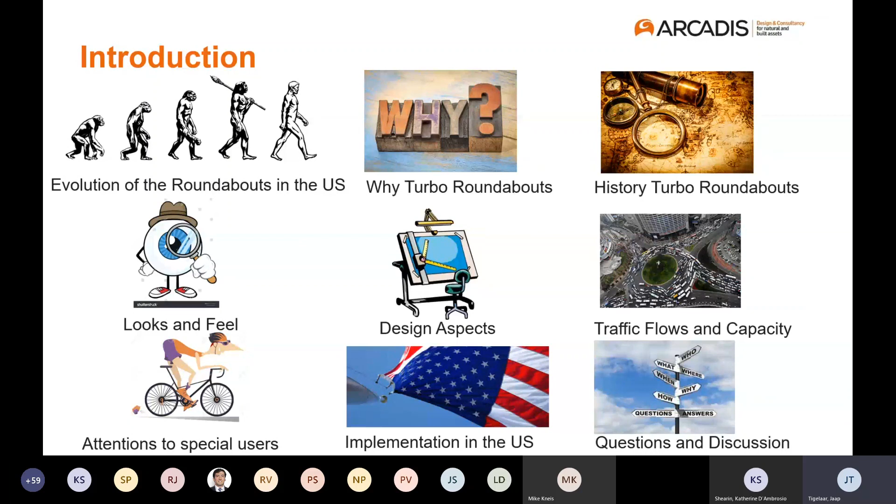For today, I'd like to touch some of the topics: dig into a bit of the evolution of roundabouts in the US, discuss why turbo roundabouts, what they are, a bit of the history, looks and feel, some details of the design aspects, traffic flows and capacity, special users like bicycles and how they use turbo roundabouts, and aspects needed for implementation in the US. And of course, afterwards there's a question and discussion possibility.

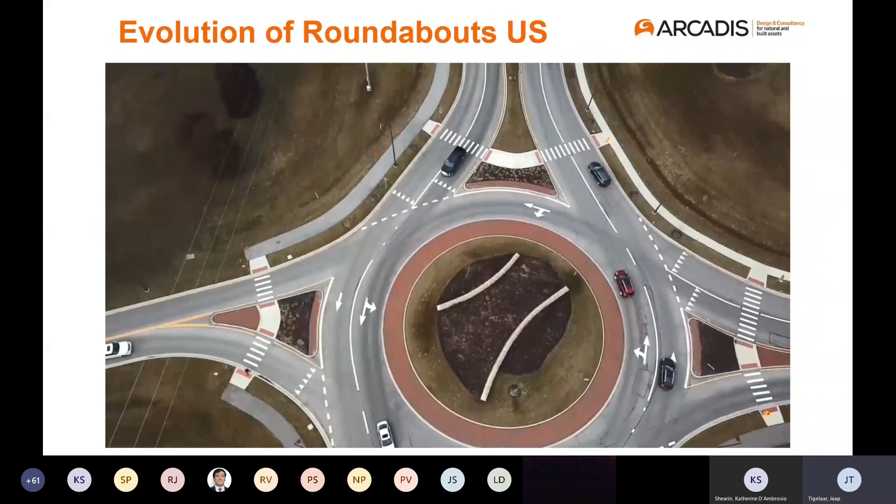So let's get into roundabouts. The roundabout journey in the US already included the simple single lane roundabouts, and we got them down pretty easy to design. We use them in urban and rural areas, low speed and high speeds. After that, we blew them up to multi-lane roundabouts, and we saw some interesting topics and problems handing over to double lane roundabouts - we'll touch that later on. After blowing them up, we also shrank them to mini roundabouts. They work well in residential and low-speed commercial areas.

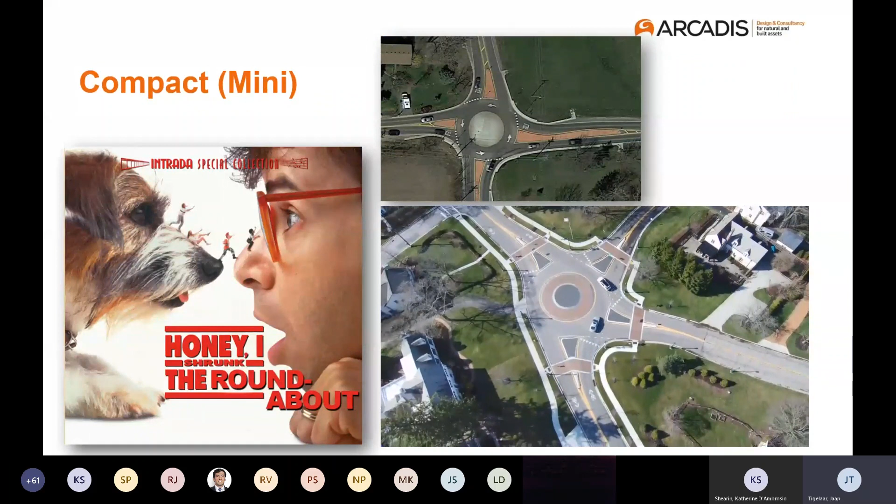But what will be next? What's the next tool in the toolbox? Can there be another type of roundabout? I think there might be - and that's the turbo roundabout. That's the typical Dutch solution for multi-lane roundabouts as we use in the Netherlands.

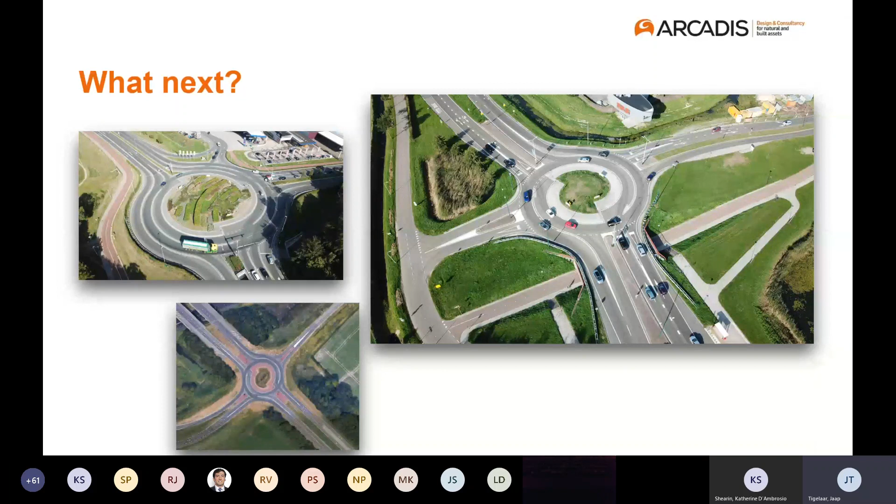So why the turbo roundabout? Well, in the 80s in the Netherlands we introduced the single lane roundabouts, and since then we've built almost 8,000 of them. Like in the US, they were very successful in the Netherlands. But with the increase of traffic and traffic volumes, the single lane roundabouts reached their capacity, and we replaced them with multi-lane roundabouts.

But this was not matched by an increase in capacity. We did not see the capacity double, and we didn't keep the same safety improvements as we had with the single lane roundabouts. We saw some fender bender crashes - people using the inside lane, hitting cars in the outside lane when leaving the roundabout. This issue we saw happening in the late 90s in the Netherlands, and this is similar to what we're experiencing in the US right now.

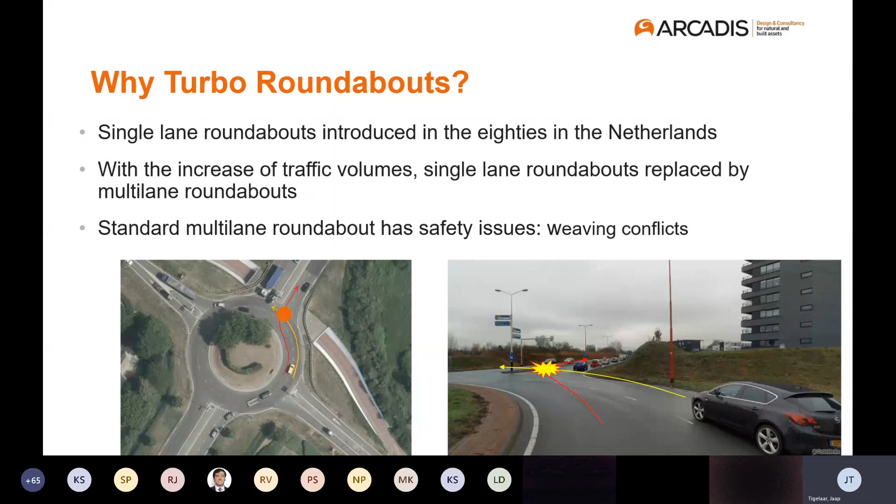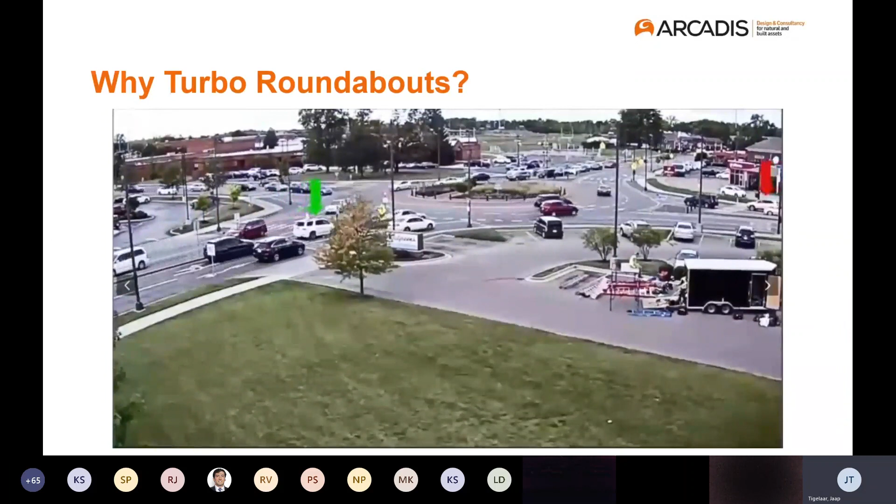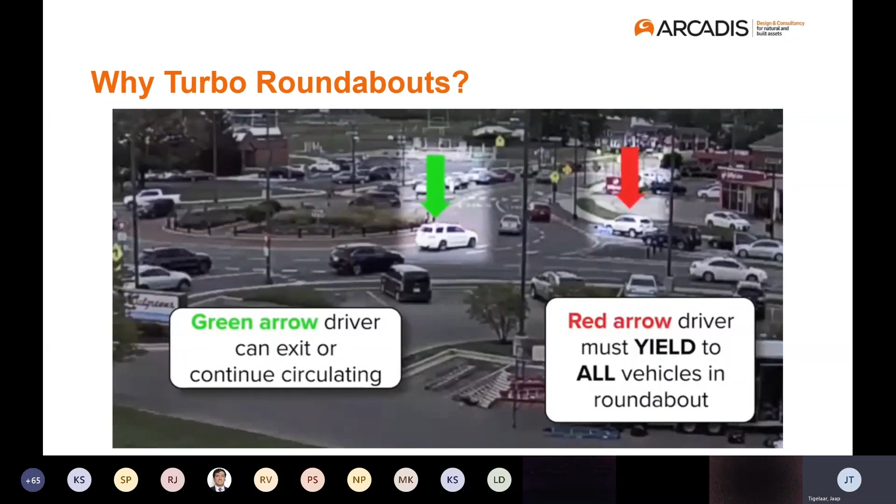So this movie illustrates two common errors drivers can make on multi-lane roundabouts. The green arrow car enters the inner lane of the roundabout, and you can see the red arrow car also wants to enter, but isn't yielding for all vehicles in the roundabout - it has to yield for all lanes at the roundabout, and we forgot to do that. So that's the first mistake: failure to yield on entry to both lanes at the roundabout.

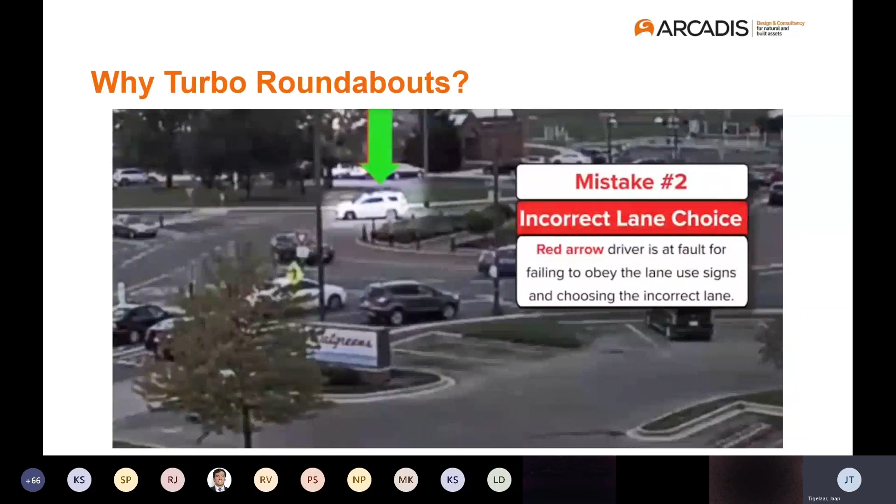When they continue, you can see what else is happening. Mistake number two: the red arrow car driver is at fault for failing to obey the lane use signs, choosing the incorrect lane, so he crashes into the car in the inner lane. When you want to make that left turn as the red car wanted to do, you needed to take the correct lane - the inside lane, not the outside lane. So those are two of the basic errors you can see happening at multi-lane roundabouts.

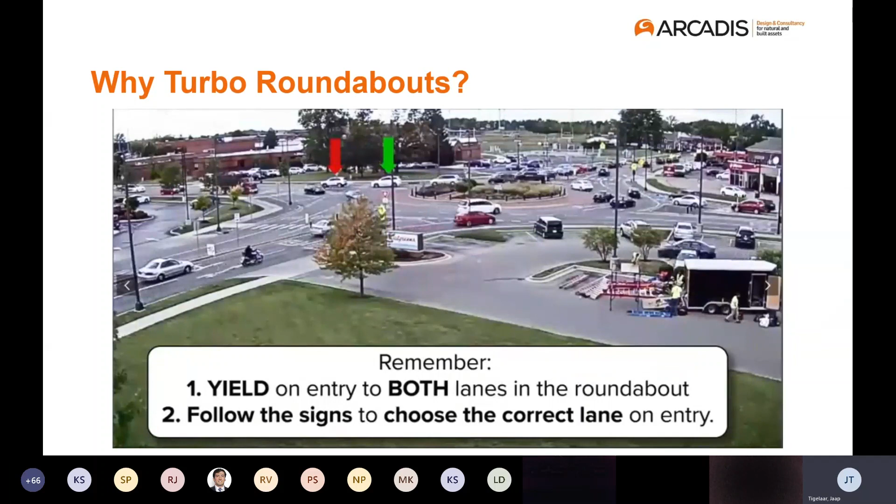And that's the safety issue we try to resolve with turbo roundabouts. So we had a challenge: design a layout which eliminates the safety conflicts but still increases the capacity. That resulted in a spiral-shaped turbo roundabout without lane changing on the roundabout itself. You may wonder why the name turbo roundabout - well, that refers to the improved traffic flow compared to a standard multi-lane roundabout, not to high speeds like the word 'turbo' suggests. Basically, we designed turbo roundabouts to operate with relatively low speeds.

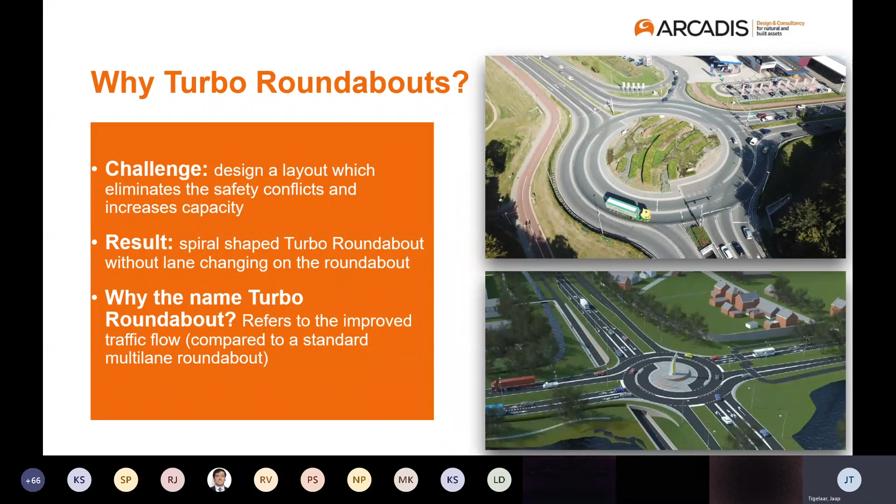So what's the turbo roundabout? How different is that from roundabouts we used to design in the US? There are four main concepts of the turbo roundabout. First, there is no lane change within the turbo roundabout. This eliminates the conflicts shown before, and this is accomplished with a small raised curb between the lanes - we'll dig into that design aspect later. With this curb in place, drivers are forced to make all lane changes well in advance of the turbo roundabout, which can be done several hundred feet before entering the roundabout.

Another very unique feature is the spiral geometry. You can think of two semi-circles of a roundabout, so you have a double lane roundabout with a little bit of an offset. This offset naturally spirals the inside lane to the outside lane of the roundabout.

And lastly, unlike many roundabouts here in the US, the approaches to the turbo roundabout are radial, that's the right angles. This is a very different philosophy on the design we use in the Netherlands instead of what we use in the US. But we will touch that a little bit later.

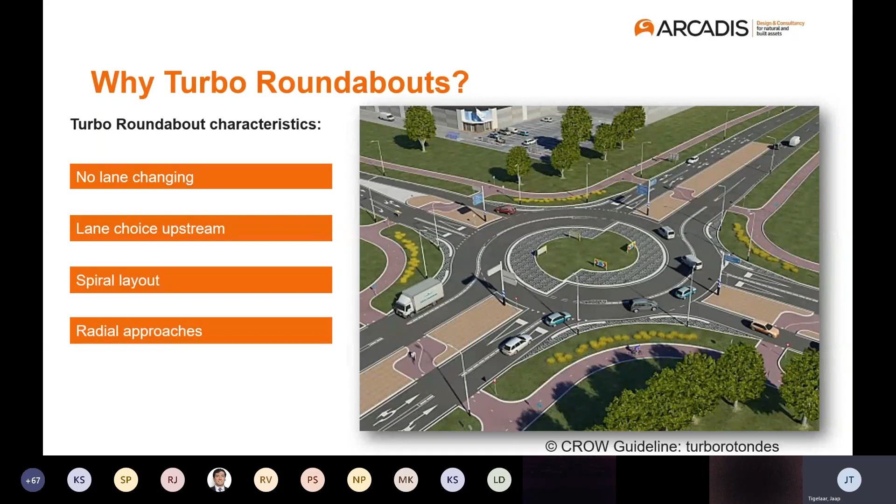And the less conflict points you have, the less chances on crashes you have. That's what we saw also in an evaluation study. One of the students, Christiaan Vos, did a study in 2016, a before and after study. He looked at several intersection types, 3 years before and 3 years after, and saw the reduction in crashes. Changing an unsignalized intersection to a turbo roundabout, we saw a reduction of 75%.

For signalized intersections, it was a similar reduction, 74%. From a multi-lane, double lane roundabout to a turbo roundabout, we saw also a decrease of 53% of the crashes. And also a single lane roundabout transformed into a turbo roundabout, we saw a 61% decrease. That is basically because you change the single lane roundabout to a turbo roundabout due to capacity conflict. If you have too many cars at the roundabout, you also have a lot of crashes. By changing and increasing the capacity to a turbo roundabout, we saw also a 61% decrease in crashes.

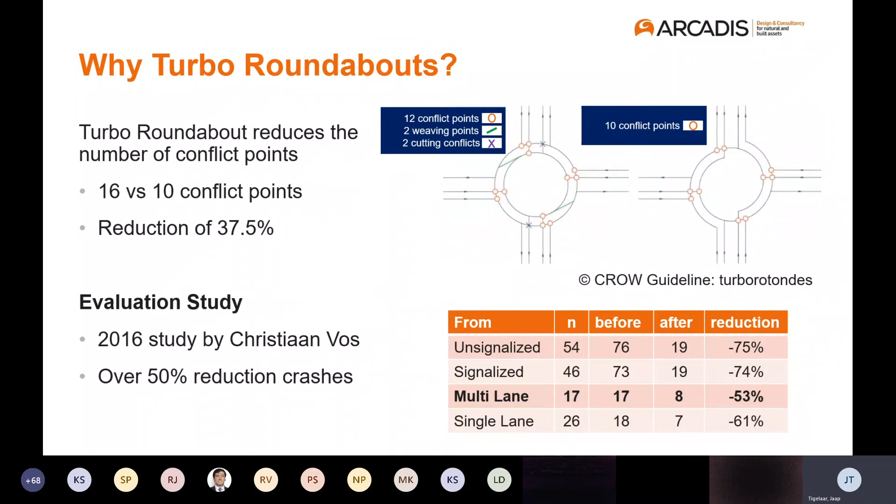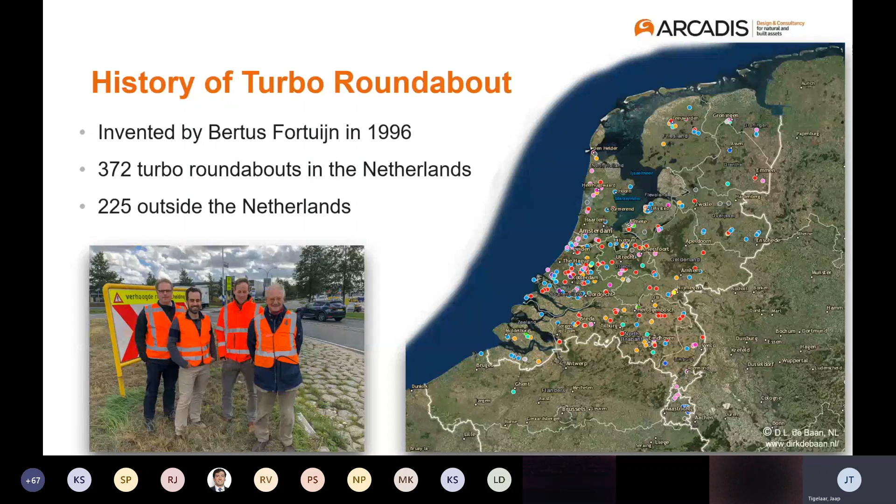Since he invented the turbo roundabout, we have already built 372 of them in the Netherlands. And if you take into account Aruba, that's 5 additional, so then it's 377. In addition to that, there are about 225 of them outside the Netherlands, basically in Eastern Europe.

In 2004, the first one came in Germany, and other countries followed, basically in Eastern Europe. Outside of Europe, there are only two of them: South Africa has one, and also in Canada there's a turbo roundabout. Well, they look like a turbo roundabout - it's not an actual turbo roundabout, I think, but they are look-alikes.

Well, what was for Fortuijn, the inventor, his design philosophy? He thought about the roundabout, and thought, how can we design safety by just implementing the right geometry? This is the turbo roundabout, and that resulted in a radial design.

Basically, a radial design makes the crossing distance, as you can see in the image, that's the colored piece, a short crossing distance - it's basically just crossing one lane. So the crossing area, the conflict area, is small, making it easy to cross, and that also raises the capacity.

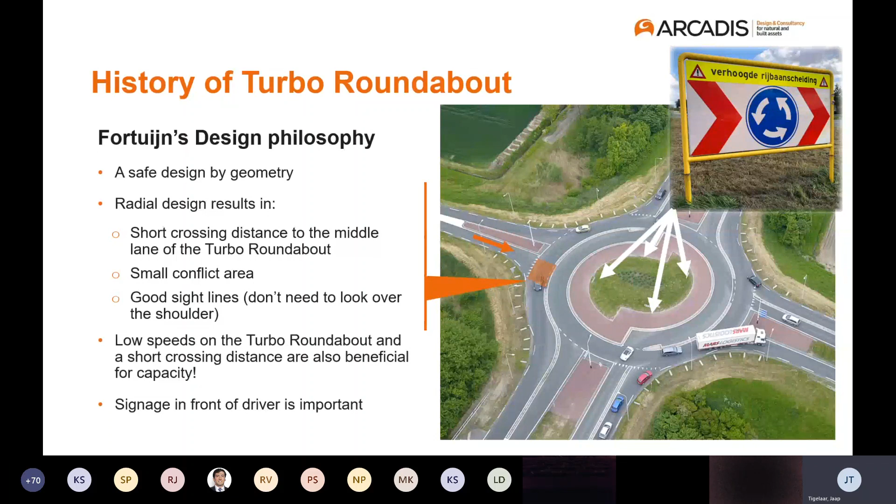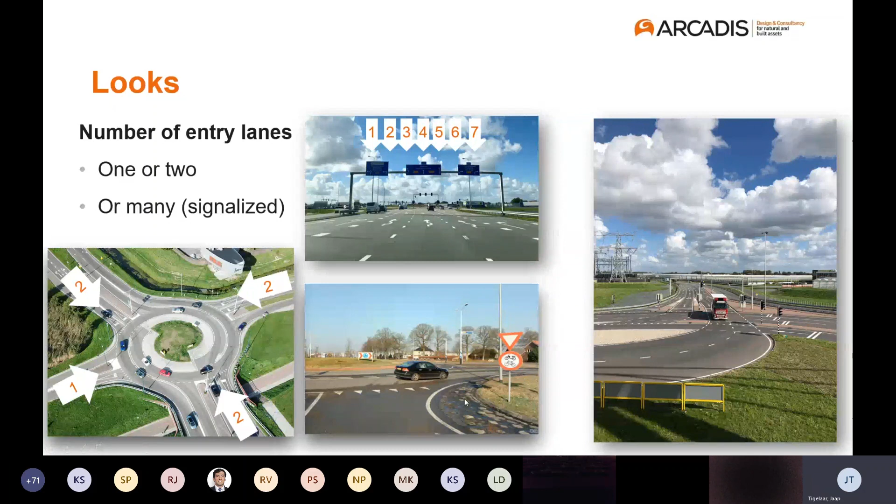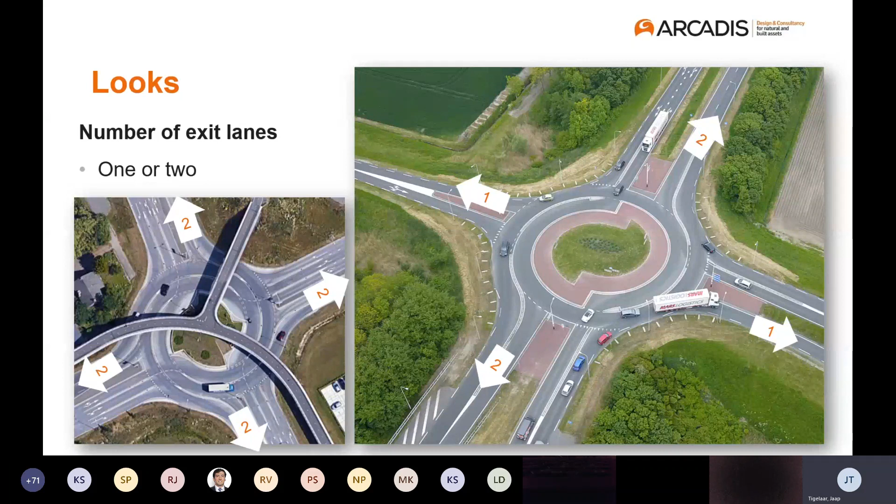You can also shape them specially. It's not necessary to have all right angles at the roundabout, so you can have different shapes in the angles. Multiple legs with an oval turbo roundabout are also possible, and we design them almost everywhere. At some interchanges with the freeway, we design peanut or dog bone turbo roundabouts.

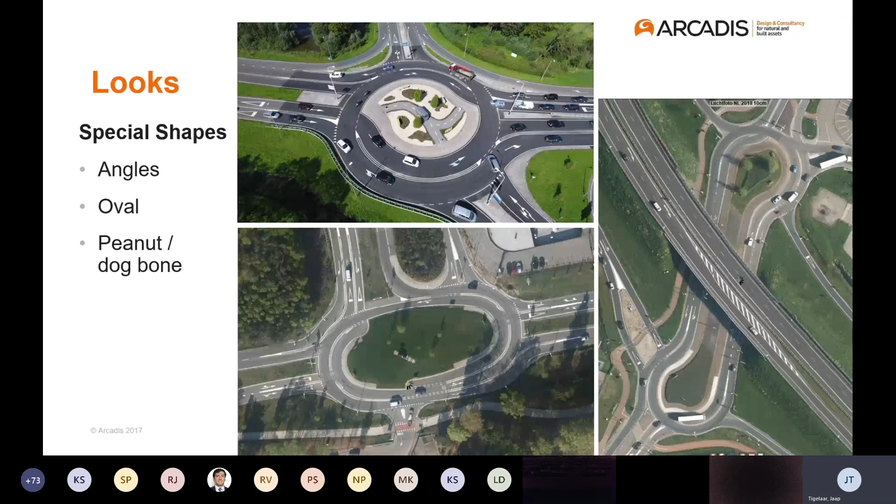Let's take a drive. How does it look? Entering the roundabout, you see signs showing which direction you need to go. This car wants to make a left turn, so it starts in the left lane, choosing the lane ahead. You can see the pavement signs and the median in the elevated lane separation.

Entering the roundabout is easy. At the roundabout itself, you are guided through it, and for the exit you just use your blinker to get out. No conflict at all, and you can reach the destination safely. This is an 80 kilometer, 50 mile per hour road.

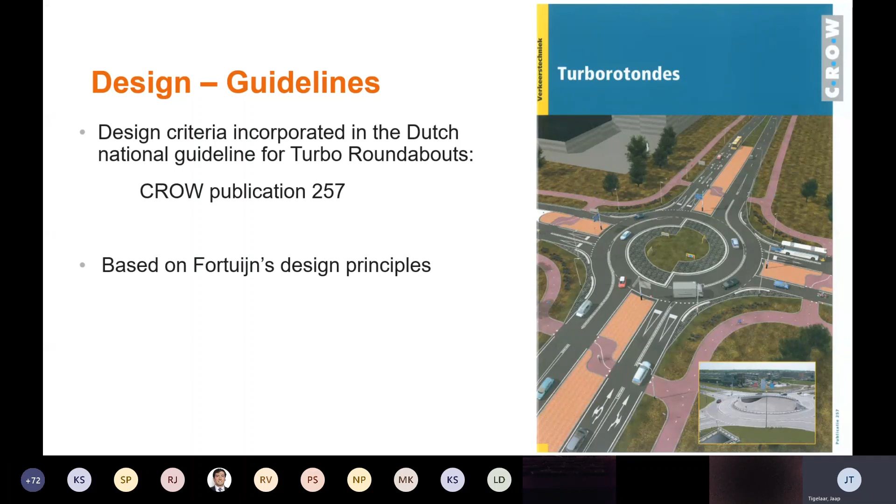A bit more into the design: all design criteria in the Netherlands are incorporated in this blue book, the national guidelines for turbo roundabouts, published by CROW publication 257. This is basically based on all of Bertus Fortuijn's principles.

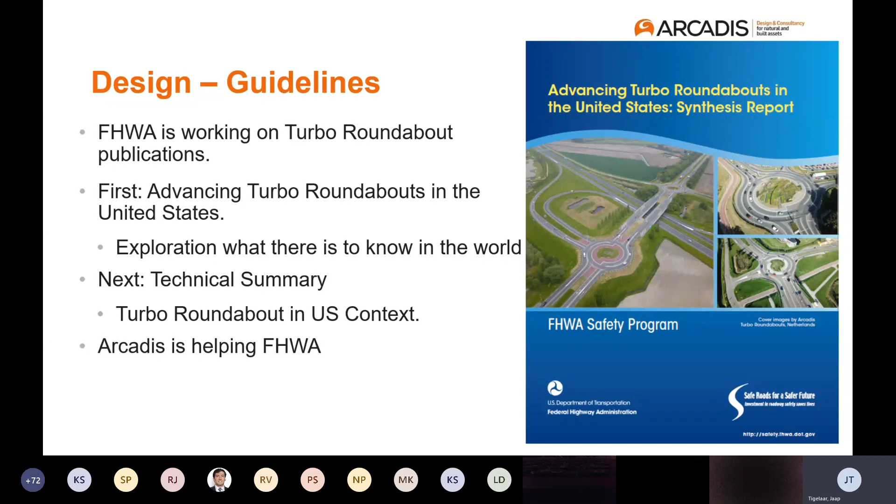The Federal Highway Administration in the US is working on Turbo Roundabouts publications, but these are not guidelines yet. The first publication is Advancing Turbo Roundabouts in the US, an exploration of what you can find in the world about turbo roundabouts. The next publication will be more of a technical summary, digging into turbo roundabout aspects in a US context. We at Arcadis are helping the FHWA with these publications because we have a lot of knowledge about them.

The spiral design, as mentioned before, the spiral geometry is a key element for the turbo roundabout. Fortuijn created a smooth spiral-shaped vehicle path by shifting the centers of the two-lane roundabouts by a single lane, as you can see in the image above. The inside lane then aligns perfectly to the outside lane, and by rotating the whole, the approaches can connect at the right radial angles. This idea looks easy, but for the actual design, the translation axis should be rightly placed on the major approaches to create similar curvature for all through traffic.

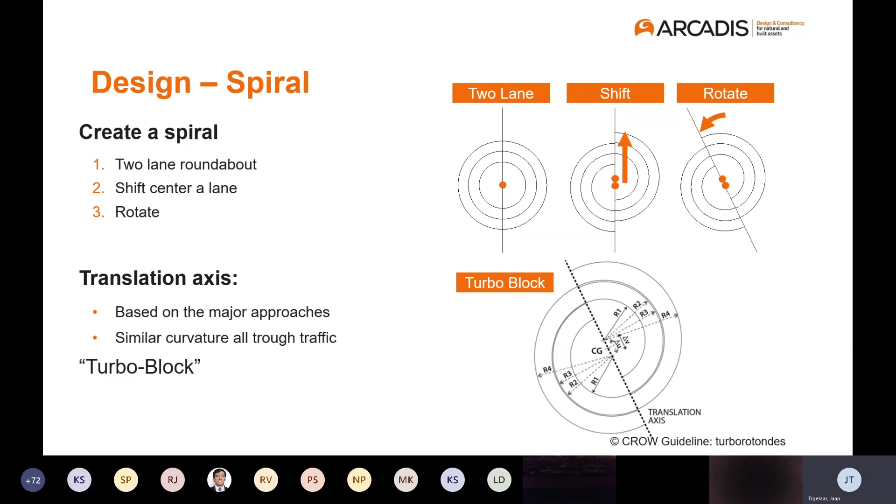This basic shape is called the turbo block. There are several turbo blocks designed by Fortuijn, and they vary in the number of approach lanes, exit lanes, and rotary lanes. Because they vary, the suitability for different locations is imminent.

As you can see, we have the basic shape turbo roundabout, this one with one translation axis. If you vary the number of entry lanes, you can see it's going to be a bit smaller capacity-wise, as shown by the blue arrows. This is for a main road with a smaller side road.

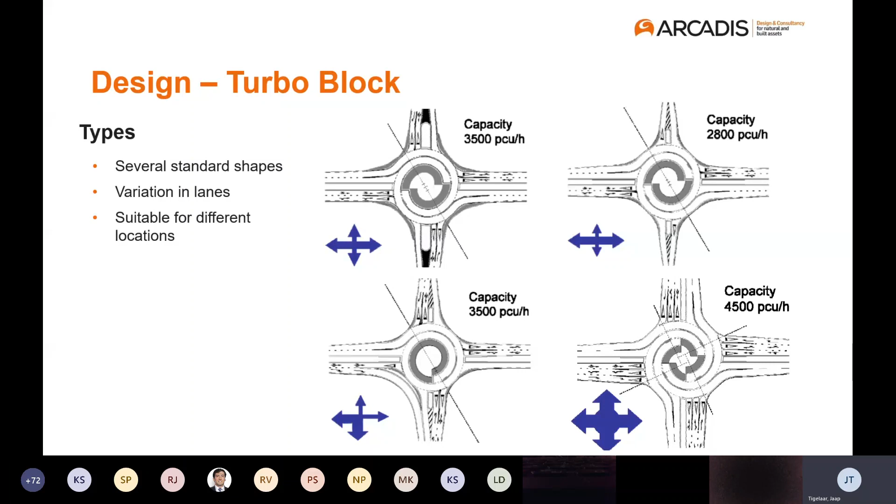If you have a high flow for right and left turns in one direction, you can make a knee roundabout, as we call it, with a sort of bypass. And when you have bigger flows, you can translate the turbo block twice with two translation axes, giving you additional lanes but with higher capacity, suitable for two similar traffic flows.

How big do we build them? Well, the size depends on the number of lanes and of course a design vehicle, similar to what we do in the US. Typically, we design the turbo roundabouts for speeds between 23 to 25 miles per hour.

A standard roundabout has an inner field radius of just a little bit lower than 40 feet. The outer diameter varies because we have that spiral layout, so we don't have a fixed outer diameter. The smallest is 148 feet, and at the largest area, it's 165 feet.

Of course, for areas with fewer trucks, we design them a little bit smaller, and with a lot of trucks, we design them a little bit bigger. The biggest are about 213 feet in diameter.

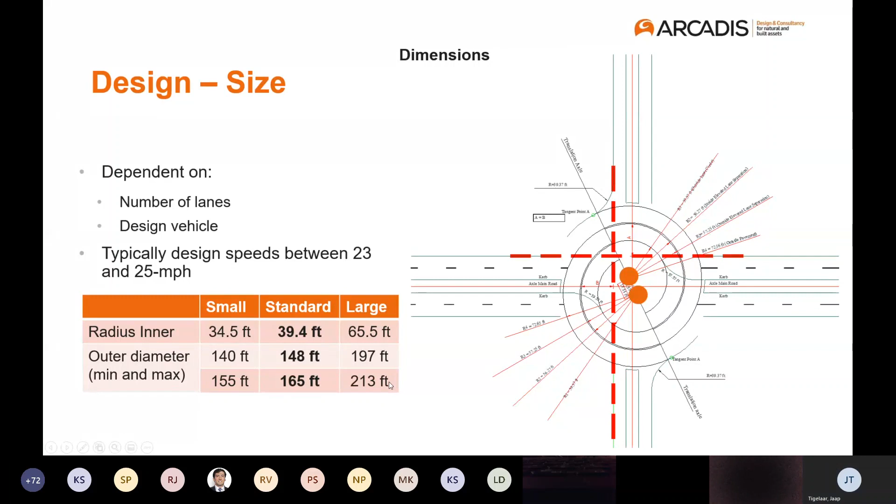We place them just a little bit over 3 inches into the pavement. This lane separation helps guide you over the roundabout, so you don't change lanes.

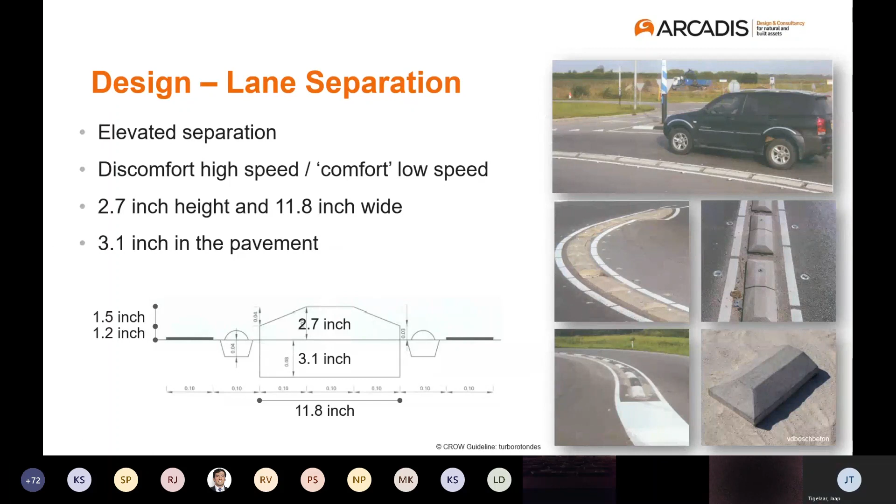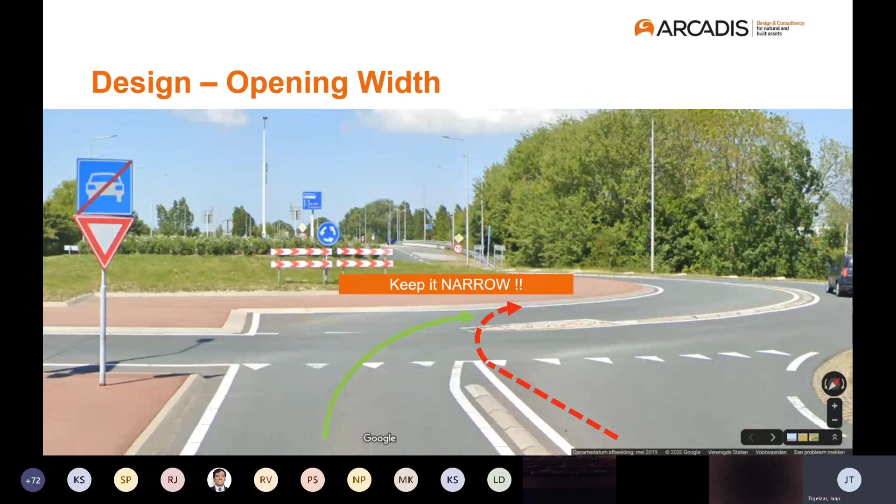Another design aspect of the turbo roundabout is the opening width, the location where the lane separations start, which is crucial for good roundabout design. The opening width should suit the situation. We want to keep it as wide as necessary so most vehicles don't negotiate the curb and can comfortably enter the inner lane. But you also don't want to make it too wide, so that people from the outer lane will jump into the inner lane. So you need to keep it narrow too.

So that's always a fight between making it wide and making it narrow. We designed a special thing for that, we call it a frog. It looks a little bit different from the elevated curb, but it shows that when you enter the roundabout in the outer lane, you will not go to the inner lane. But when you drive in the inner lane and want to stay there, you can ride over it if necessary.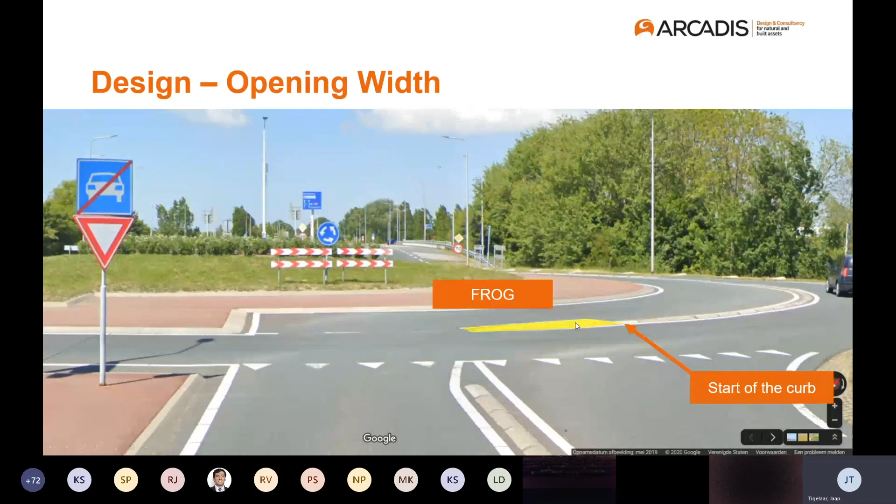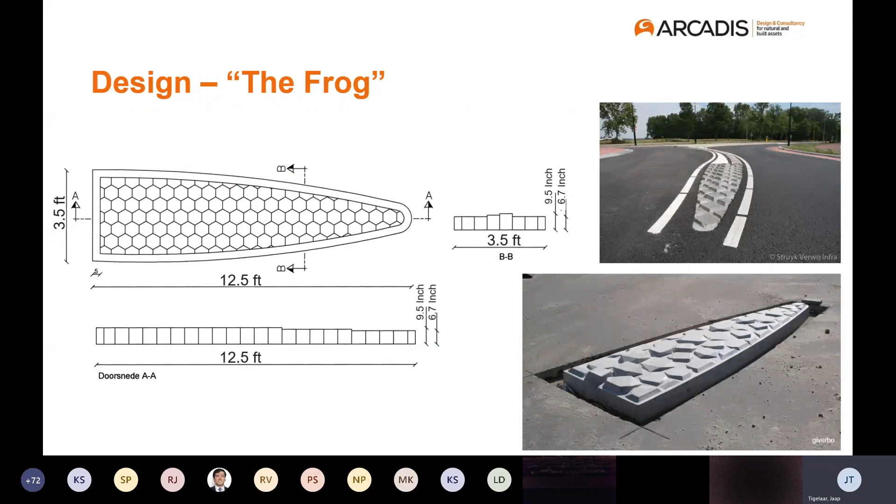How does it look like? It's lower than the elevated lane separation, about 12.5 feet long, 3.5 feet wide, and we also place them in the pavement.

Next to the lane separation, markings and signage are really important for the turbo roundabout, because you need to choose your lane well ahead of the roundabout, since you cannot change lanes at the roundabout anymore. So upstream, it's necessary to have clear directions with destinations. We always place signage just in front of the roundabout with the destinations, where you want to go - left, right, or straight.

Near the roundabout, we place other signs, if possible above the road, but sometimes also next to the road, again with the destination for each lane. And next to that, on the pavement, we place the directions again, showing which lane goes which direction.

On the roundabout itself, it's not necessary to have signage. We don't put signage on the pavement there. Some road authorities do it, but because you cannot change lanes and can only exit, you actually don't need it anymore, because you can only follow that lane.

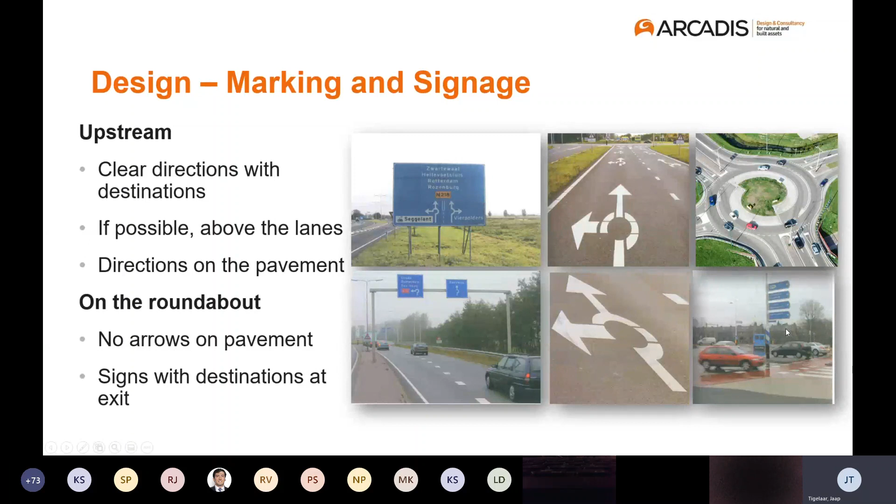When you exit the roundabout, we place the destinations again, so when you want to enter, you can see where you can go.

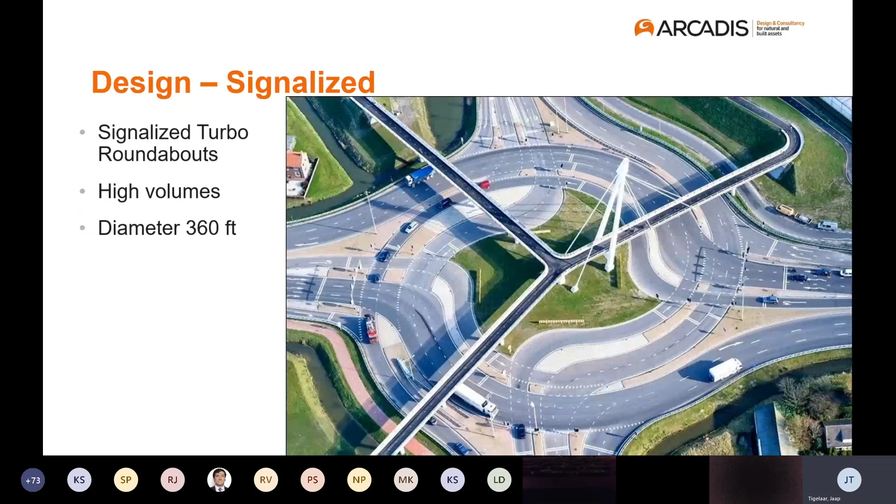When we built the big roundabouts, turbo roundabouts, these are really large with a diameter of 360 feet. These are signalized. They can handle high volumes, up to 8, 9, 10,000 cars an hour.

Speaking about capacity, this is a table. It's in Dutch, sorry for that, but it shows at least a list of the intersection layouts. We have the single lane roundabout, the double lane roundabout, and the turbo roundabout designs, and then signalized intersections.

What we have in the columns is the theoretical capacity. That's basically the sum of all approaches, and the practical capacity, based on all the formulas, which is what we experience in real life. And of course, the entering conflict volumes.

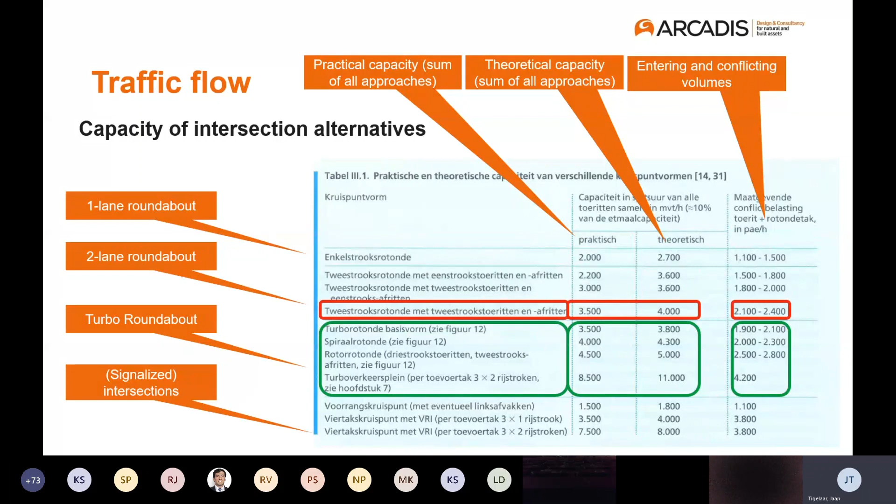What we see is when you look at a double roundabout, multi-lane roundabout, the practical capacity is about 3,500 vehicles. The basic shaped turbo roundabout has a similar capacity. If you build them bigger, to the spiral roundabout or the rotor roundabout with multiple entry lanes, you can reach 4,500 cars an hour. And when you build the big ones we saw in the slide before, you can reach over 8,000 cars an hour. That's pretty high volumes for an intersection.

To calculate which turbo roundabout is suitable for the location, we have a tool. It's called the Meerstrooksrotonde verkenner. In English, that's the multi-lane roundabout explorer. It calculates the capacity in a simple Excel tool.

It compares the various types of roundabouts, from a single lane roundabout to a double lane to a turbo roundabout with different shapes, including a bypass turbo roundabout, the egg roundabout, turbo roundabout, knee roundabouts, and rotor roundabouts. By just adding the capacity, you can see if a roundabout is suitable.

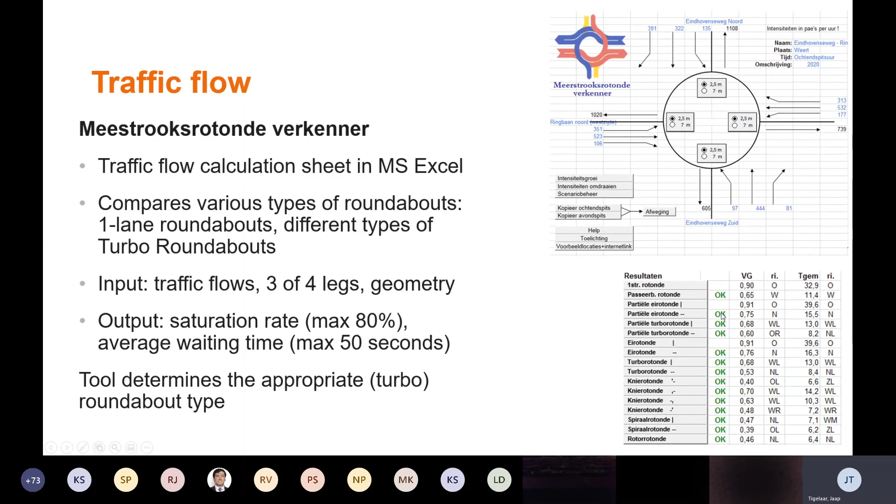It takes a look at the saturation rate and the average waiting time. If the saturation rate is below 80% and the average waiting time below 50 seconds, then we say a turbo roundabout is suitable. Otherwise, it's not suitable. So this helps determine which designs are appropriate to look at.

If you look at the capacity formulas, this is a graph showing the flow at the mainstream on the x-axis, and the y-axis shows the flow of the secondary stream. What we see, based on traffic formulas, is that a double lane roundabout, the blue line, operates slightly better with a lower flow on the mainstream.

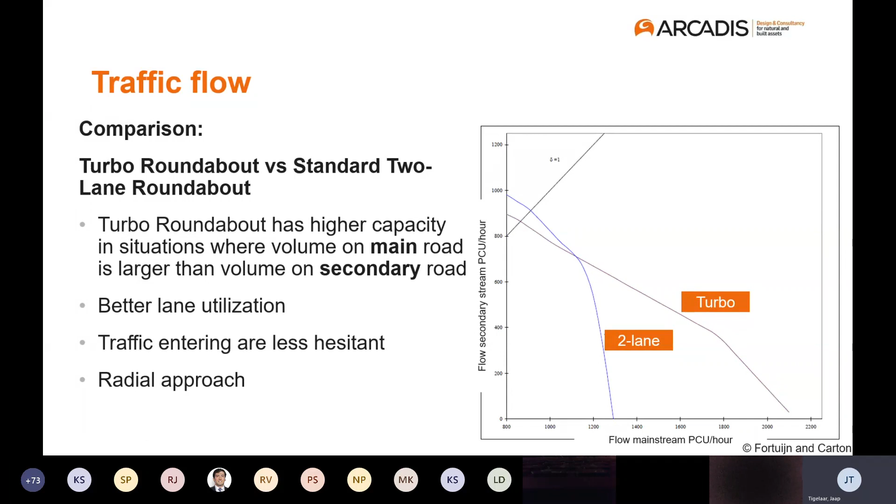You can see we operate a little bit better. But when the flow at the mainstream increases, the turbo roundabout operates way better. That's basically because the turbo roundabout has better lane utilization. Next to that, traffic entering the roundabout is less hesitant because they know they cannot hit on the roundabout, and they also have a smaller conflict area, because of that radial approach.

Meaning we need great bike safety, which means we need the right bike facilities. And that can only be done if we have bike safety. The Dutch policy in general is to reduce the differences between mass, speed, and direction. By doing that, you can design safe infrastructure. That's in general, but it also holds for roundabouts of course.

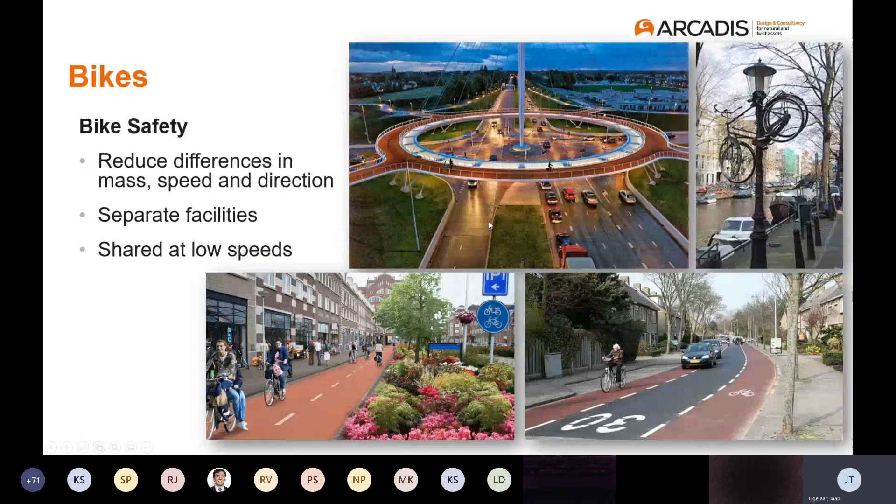For roundabouts, we try to do it as safely as possible. In the Netherlands, at roundabouts, we have separate facilities. If we don't have enough space to make a separate bike path, we at least provide bike lanes.

Within the city limits, bikes have the right of way, as you can see over here. Outside the city limits, with higher speeds of cars, bikes must yield for the cars.

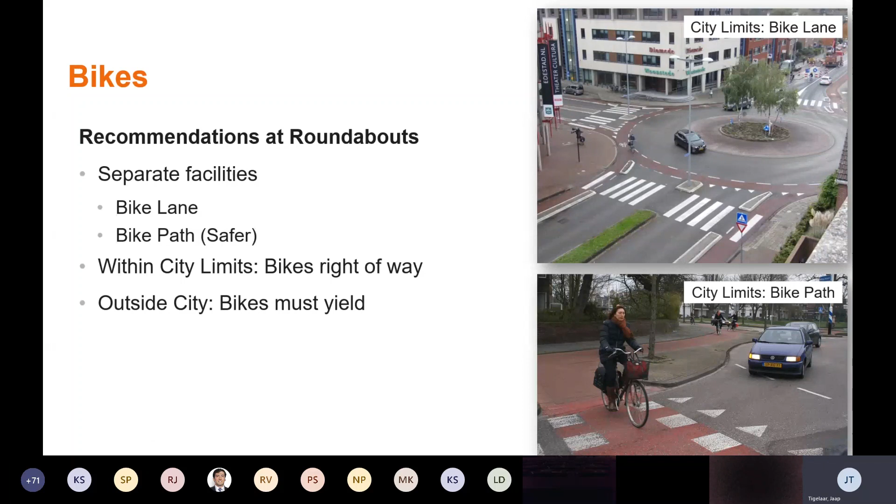At the turbo roundabout, they have to cross multiple lanes, and we don't allow bikes there. So when we design a turbo roundabout, it's always with a separate bike facility.

To cross the multiple lanes, cyclists can use the median, as you can see top bottom and top right, crossing the full crossing in twice. We designed that crossing in the median as an S-shape, which slows down the speeds of the bicycles, but it has an additional benefit: in the middle, bicycles are facing the cars coming to the roundabout, so they always have better eye contact.

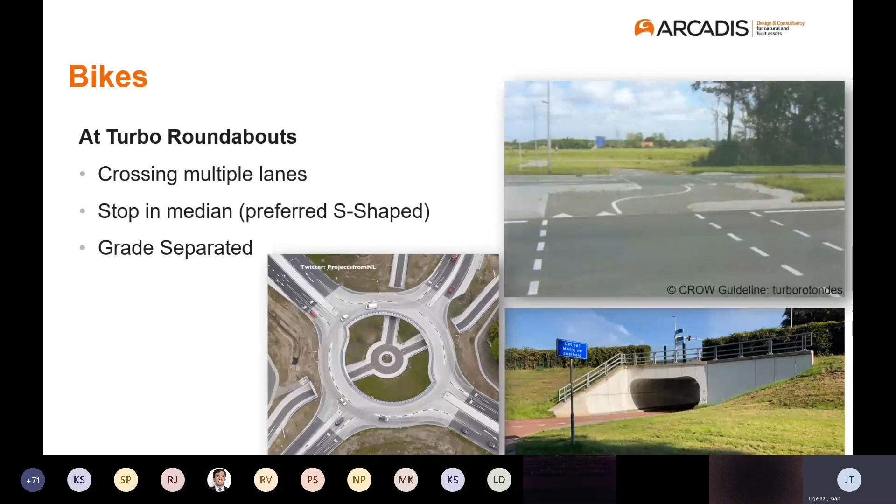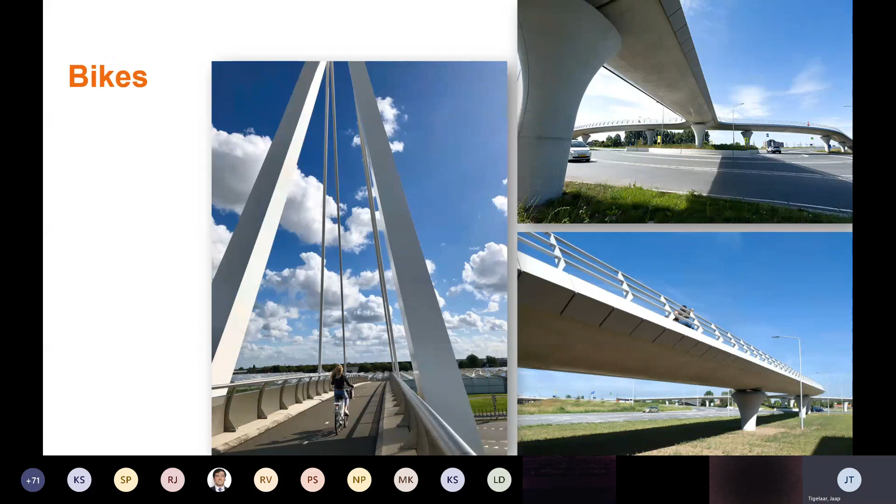With higher volumes, we do a grade separation crossing. On the right bottom, we have just a simple bicycle tunnel. But on the left, we have a bicycle route with a bicycle roundabout in the mid-center. We do something special where the number of bikes is really high or there are important connections needing a safe passage. With the big roundabouts, we build nice bridges all over it, but this is a really expensive solution, so we only do it for special locations.

Other specific uses are trucks, of course. In the Netherlands, the typical Dutch truck is similar to a WB50, that's our design vehicle. We tested the basic roundabout with a diameter of 165 feet with the design vehicle.

WB62, and what we see is it takes a little bit of the outer edges. So when you want to design a roundabout for WB62, you need a little bit more space, about 180 to 190 feet, to provide a better way for the trucks. On the basic shape roundabout, the WB40 works pretty well, of course.

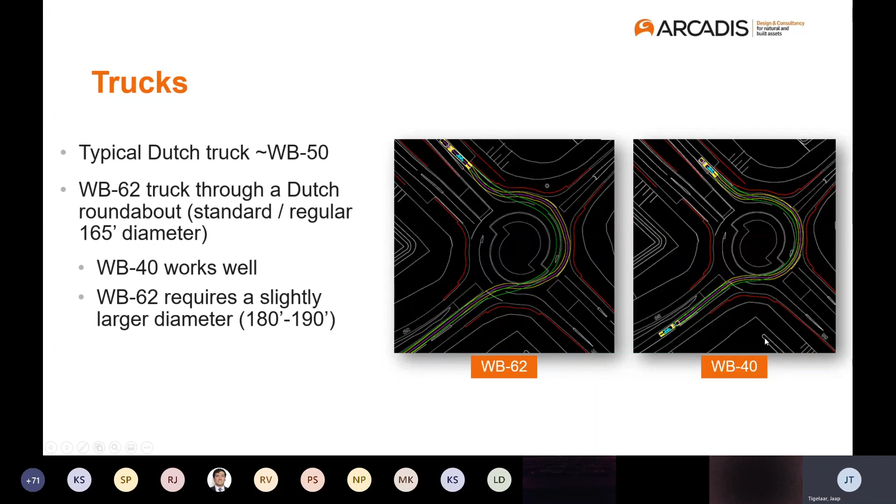But in the Netherlands, we also build bigger roundabouts. This roundabout is 190 feet, and this truck entering the roundabout is an 82.8 foot long truck. It's making the left turn, and as you can see, it enters the roundabout and stays in its own lane. It doesn't use any other space, no other lane, and it's heading out to the freeway ahead. It's easy and no special things appearing.

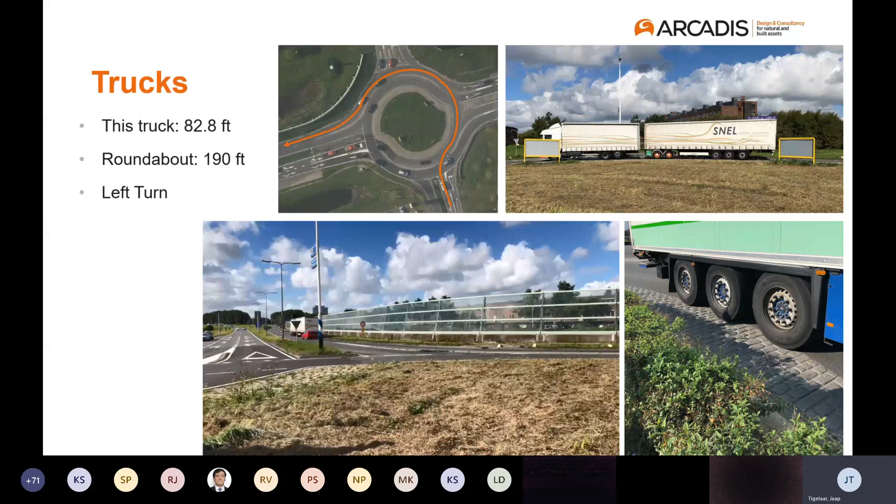This has a little bit of a different layout than the WB62 or the 67s, but as you can see, this is also a big truck using the roundabout as it should be. When you build them a little bit smaller, you can add truck aprons, easy to ride over for trucks, not so easy for cars.

Other special uses are motorcycles. The main concern we heard in the US about motorcycles is how they use the elevated lane separations - those are not ideal for motorcycles. But what we experience in the Netherlands is that the smaller chance that drivers unexpectedly make a left lane change, not possible anymore at turbo roundabouts, outweighs the risk of hitting the elevated lane separations.

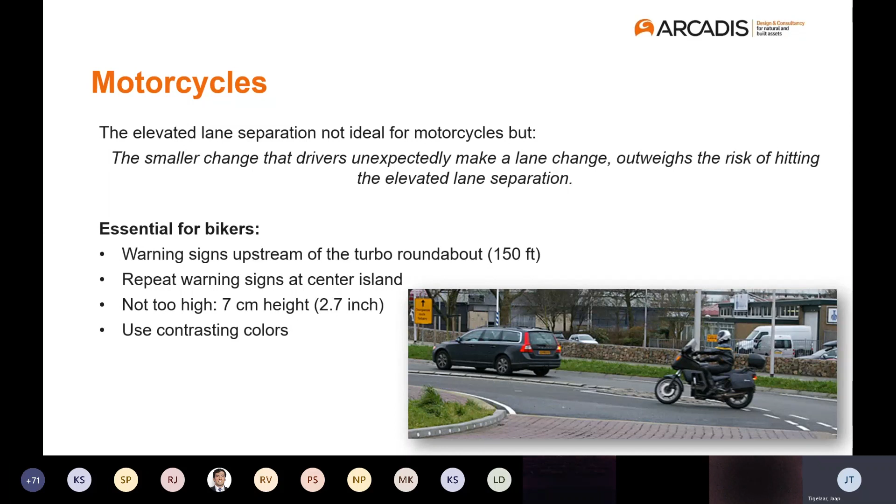So in the end, motorcycles also like turbo roundabouts better than normal double lane roundabouts, because it's safer for them. But it's essential to design the turbo roundabouts well, meaning we have warning signs upstream of the turbo roundabout about 150 feet ahead. We repeat warning signs at the center island, and we don't design the lane separations too high, just a few inches, and we use contrasting colors, as shown in this slide.

So what we do is use signage upstream. This means 'verhoogde rijbaanscheiding', meaning elevated lane separation. At the center island, we have a similar warning for motorcycles. The lane separation is not too high, so it's safe to ride over, and we use as high contrast as possible.

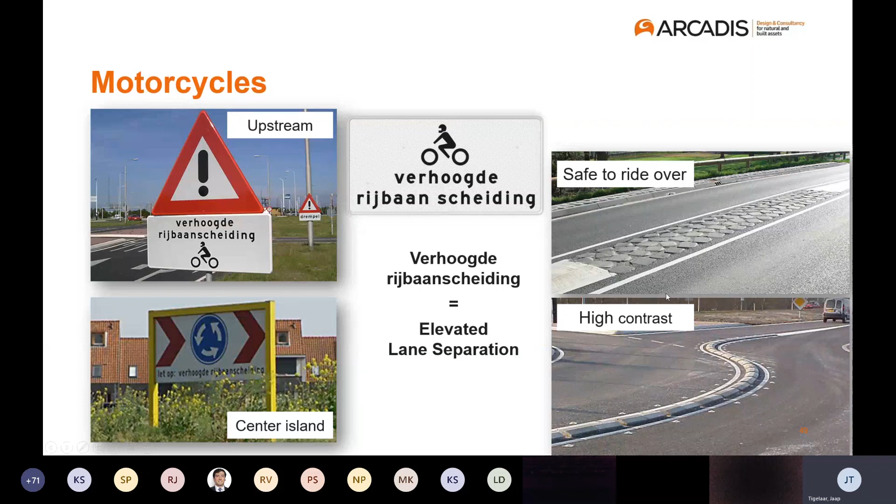To continue, what will be the next steps for implementing them in the US? Because we don't have them yet. We hear some hesitations, but we also see a lot of benefits.

What I think is necessary - we've shown you the Dutch standards, and we probably need minor adjustments to fit the US design vehicles. There's a little bit different driving behavior, meaning maybe we need to use a different lane width, a different diameter, or something like that. Next to that, we need to calibrate and validate US driver behavior.

That's basically taking care of the capacity issue. Because we drive differently in the US, are the capacity values we showed before different or not? Of course, look at specific conditions like drainage, or when we had a presentation in Florida, it was all about hurricanes and how you put the signs on top of that. In the north of the US, we had discussions about snow plowing. Everything can be addressed, but you have to look at those conditions and show what solutions are suitable. Because people are hesitant, there should be a proper introduction of the concept so people understand how to use it, how it works, and why it's safe and better.

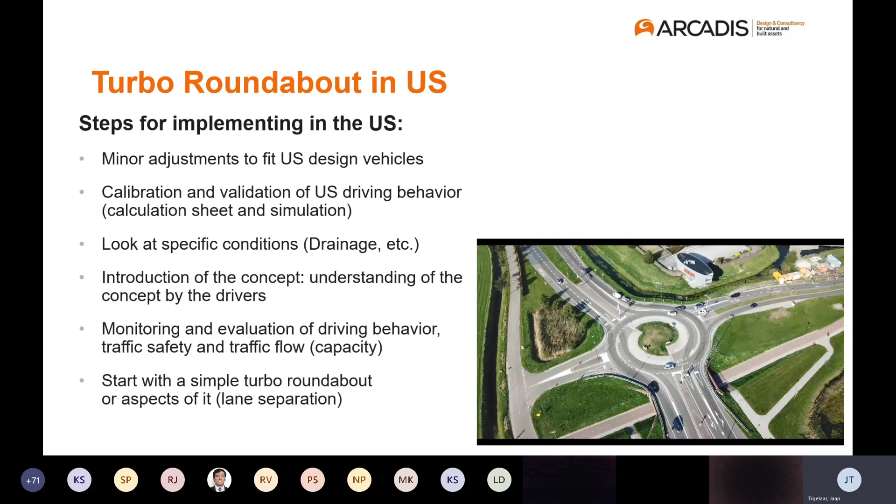In our studies in the US, we already implemented some of the turbo roundabout aspects. As you can see in the right top and right bottom, these are two intersections in Jacksonville, Florida, where we evaluated the turbo roundabout design. The top one should be getting built, but there is some delay. On the left one, we implemented the turbo roundabout concept in the designs, and we designed two turbo roundabouts in a corridor of a few miles. This is a VISSIM simulation of it, to help the client and also show the public and investors how a turbo roundabout looks and works.

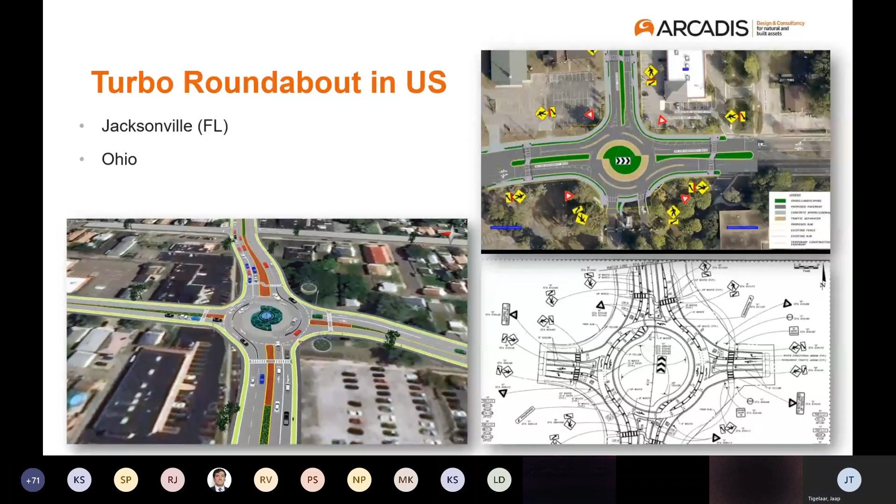That's basically everything I wanted to show you. A lot of information, maybe not all new, but some new. Let me see, maybe you have some questions, or we can have a discussion about the aspects we showed, or maybe new topics.

We do have a question. Hold on. Okay, let's try that again.

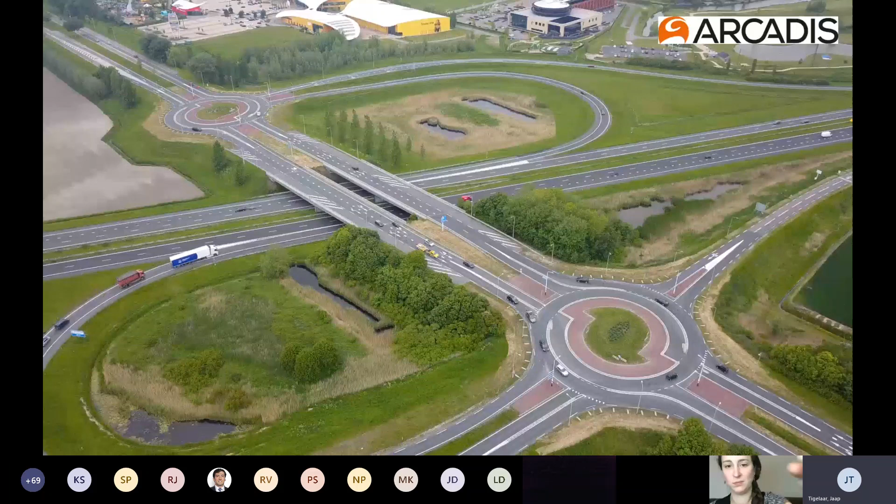What has been your experience with the rock pavers used for the truck apron in the center island? Our experience is pretty good. Where we normally use them is inside these kinds of aprons, in the axle of the corners and in the entry lanes. Also in the center islands we can use them. What we see is cars actually not using them - they see it's not beneficial to ride over, it's hard to ride over - and for trucks it's easy, they can almost ride over everything. So using those rocks, as you call them, you can design your turbo roundabouts a little bit smaller to reduce the speeds, but still be able to accommodate the bigger trucks.

This next question just says: fewer crashes or less severe crashes, or both? We see both. At least we see fewer severe crashes. Lower speed also means less severe crashes, but in general it's lower crashes in total.